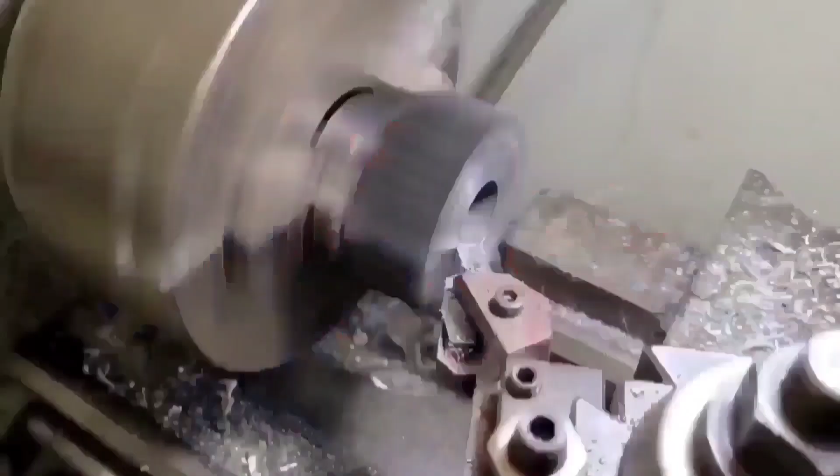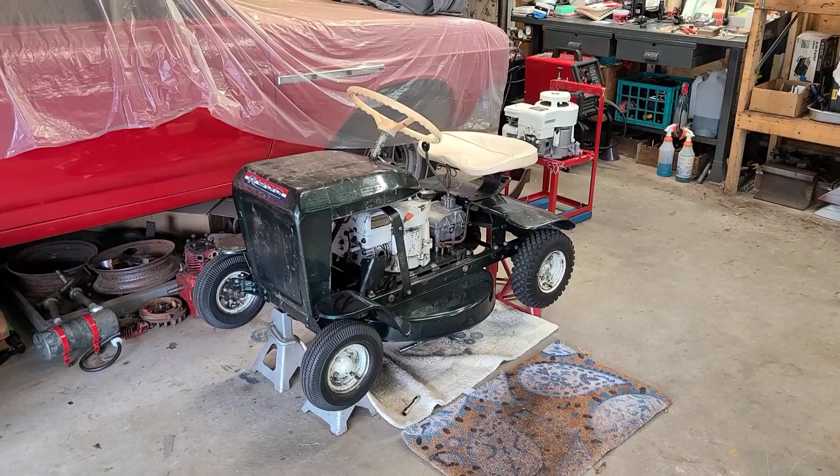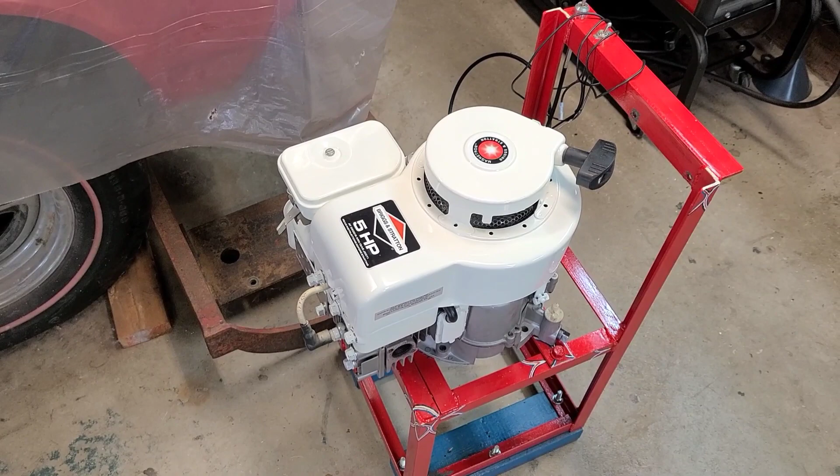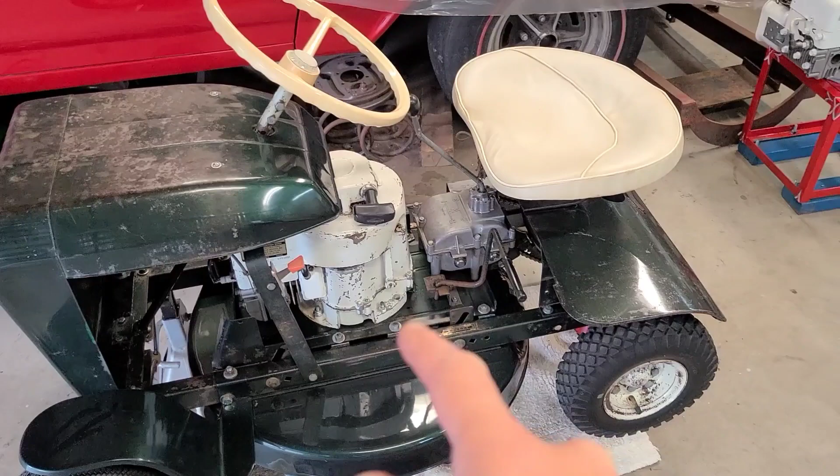How you doing, guys? Today I'm starting the field strip of my Rug Rider in order to get the 5 horsepower electric start engine that I just finished in the last couple videos onto it. You can see I put the decal kit on there, so the engine looks sharp. This isn't going to entail any surgery, nothing needs to be modified, but I do need to take the mower deck off, all the pulleys, the hood, the steering wheel, and the hood stands out of the way in order to get the bolts up and lift that engine up and off of the engine plate. So what I'm going to do is get this thing field stripped, and then we'll start talking about how we're going to reassemble it and get the electric start engine in place. Just when I thought I had everything thought through, curveball.

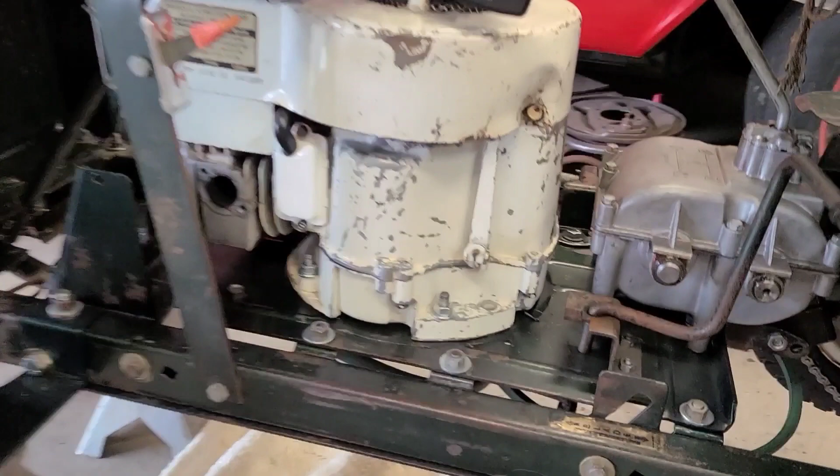Okay, so let's see why. The 4 horsepower engine that's on the tractor, the original style engine, has a 1-inch crankshaft with a 3/16 key slot. The new engine, the 5 horsepower engine, has a 1-inch crankshaft too, but it has a 1/4-inch key slot. So this key slot is too big for the original pulley that goes on the Rug Rider. It's good and it's bad. It's good because there's no point in field stripping this tractor any further - I really need to get the engine pulley to fit and work on this engine. So the bad is we're going to take it off the jack stands and put it back in the corner, and I'm going to have to spend time making a new key insert so I can use that slot with the original pulley.

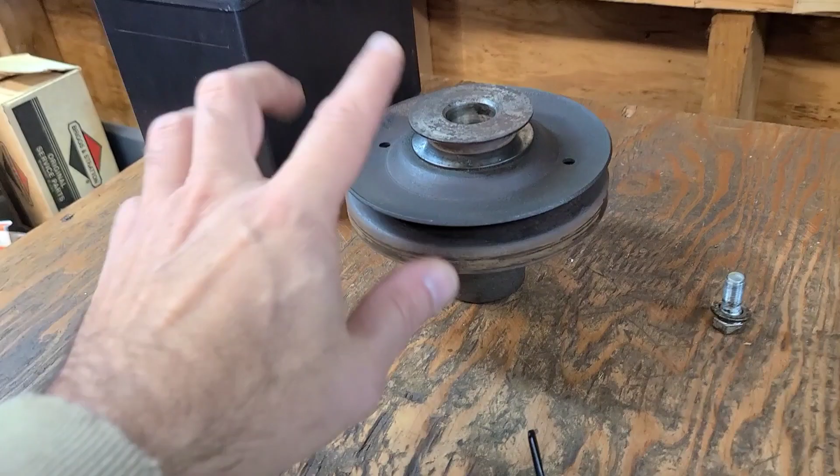So we're going to have a little bit of engineering going on, right? But the good is this - it's smaller on this engine than it is on that engine. Because if this engine was 3/16 and that was 1/4-inch, that would be a real problem, because then I'd have to modify this original pulley if I wanted to put the engine on. And we are not modifying the original pulley. We're not doing that. So basically, where is it? Here we go. Where is that little... yeah, that's it. Yeah, there it is.

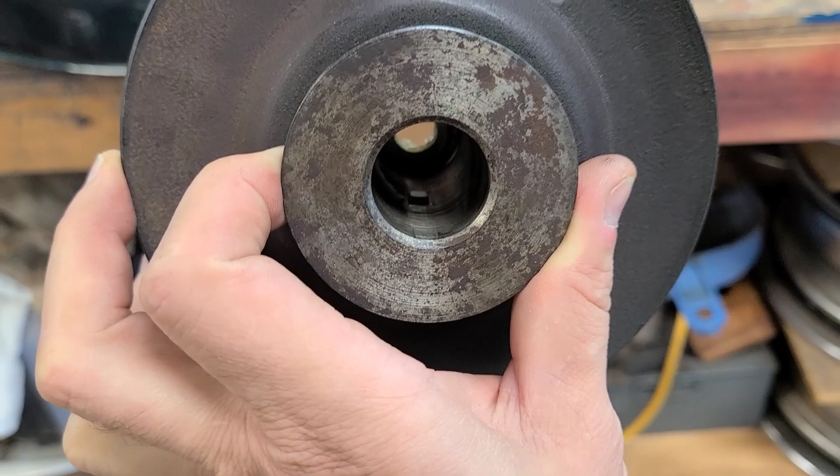If you look right in here, you can see there's a small 3/16 nub inside this pulley. So what I'm going to do is go get a piece of 1/4-inch key stock that fits this slot in the crank, and then I'll get like a small Woodruff key cutter. I'll make a little dimple right in the center where that 3/16 nub or key can go into, and then I'll have the key all the way through, the 1/4-inch key all the way, then I'll make the nub. So I'll put that in place, and then slide the whole assembly up onto the crankshaft, and it should actually be better - where this just had that little tiny nub to keep the engine rolling forward, which drives the transmission, I'll have full engagement all the way through the entire keyway of the crank.

All right, that was a lot, I'm sorry, but there's no point in going any further. So I'm going to take this thing off the jack stands. I am going to probably go to the hardware store and get a key, a 1/4-inch key - key material, I should say, unless I have some. I might have some, but I'll have to check. And then we'll start doing the layout and getting the pulley to fit onto this crankshaft perfectly before we go any further with this.

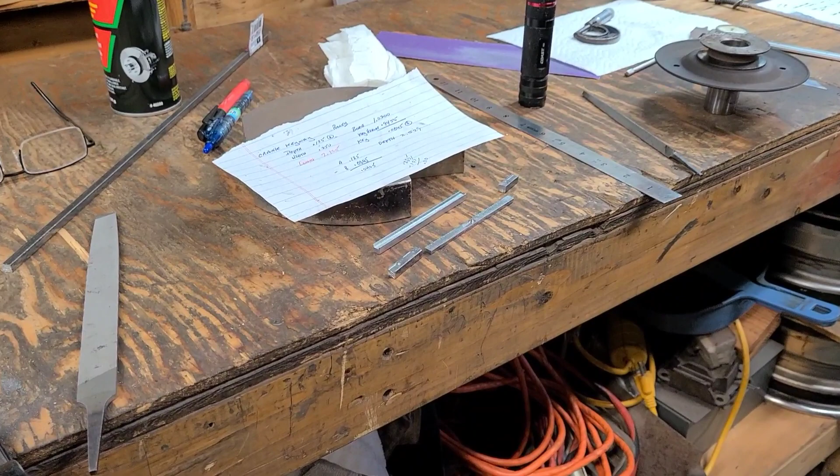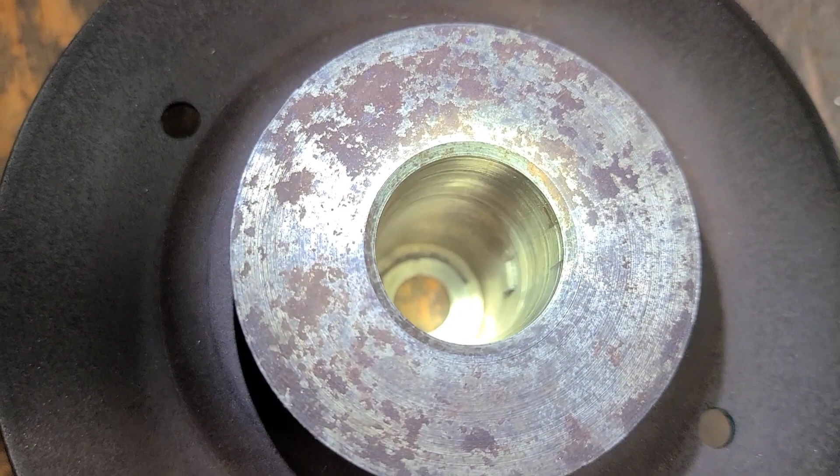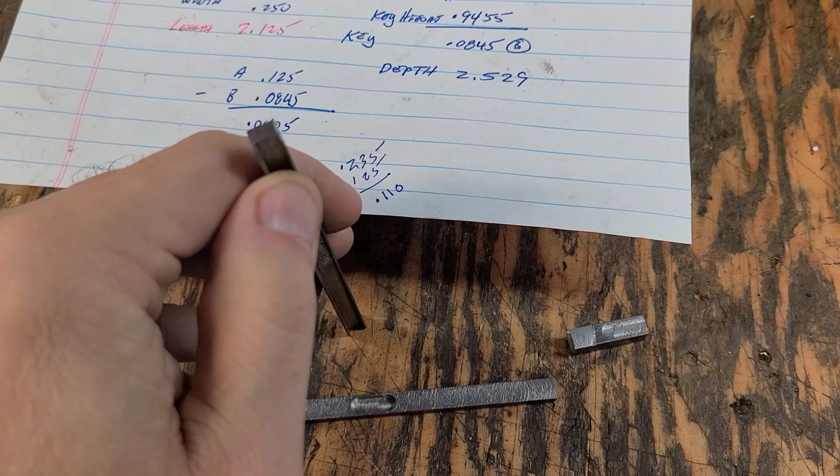So after some rough math and a little bit of machining, I came up with what I think is going to work. My original thought or design was to basically make a little trough that the little nub inside the pulley here - you can see it right there at about the 3 o'clock position - that little nub engages the key of the crankshaft of the motor. I thought I would start off and just make a big trough slot that little nub could go in, and then this would fit into the keyway into the crankshaft. But after looking at it, I was like, you know what, this is just not what I want.

So I went to design number 2, which is to actually make an insert for the crankshaft. I'll plow out a little section, a little cove if you want to call it, that the nub in the pulley will interface with. So I'll drop this down into the pulley, put the nub in there, and then slide the pulley and this insert all the way up the key slot of the crankshaft.

Now, I cut these ends off it, and I do need to trim the ends down to get this slot centered up so the little key nub will drop into it easily. But in general, the mathematics here is pretty simple.

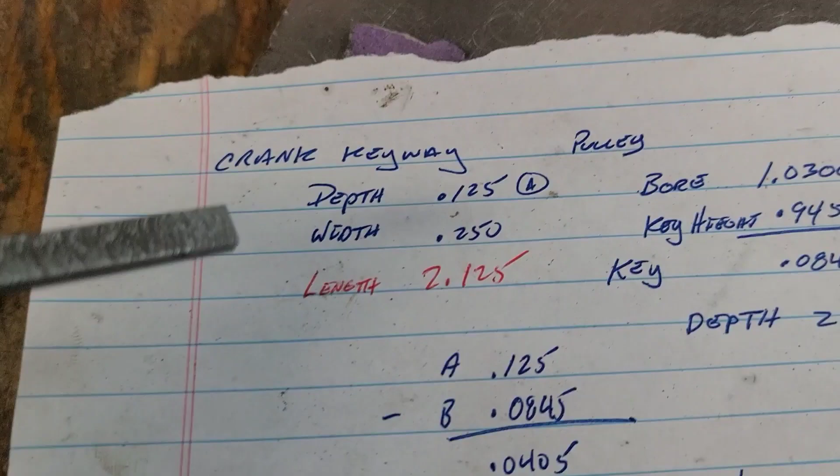The depth of the keyway in the crank is 1/8 of an inch. That's that thickness right there. The width is 1/4 inch. That's the width right there.

And the length is 2.125, 2 1/8 inches. But I'll make that in a few minutes.

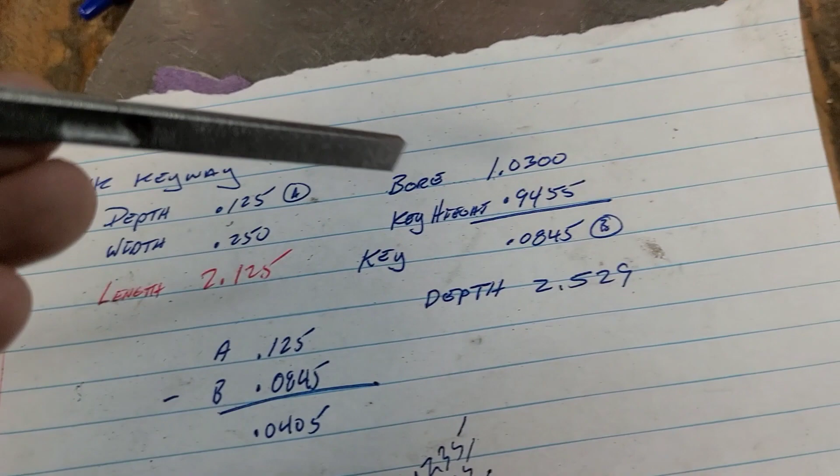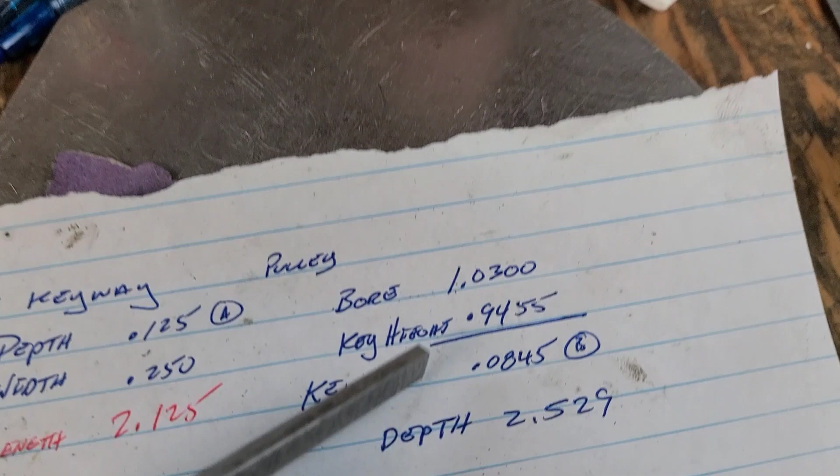Now, to come up with how deep this slot needed to be, I took my little bore gauge and I measured the bore of the pulley, which was exactly or pretty close to 1.0300. And then I took another measurement with the bore gauge from the top of the nub to the opposing side of the bore.

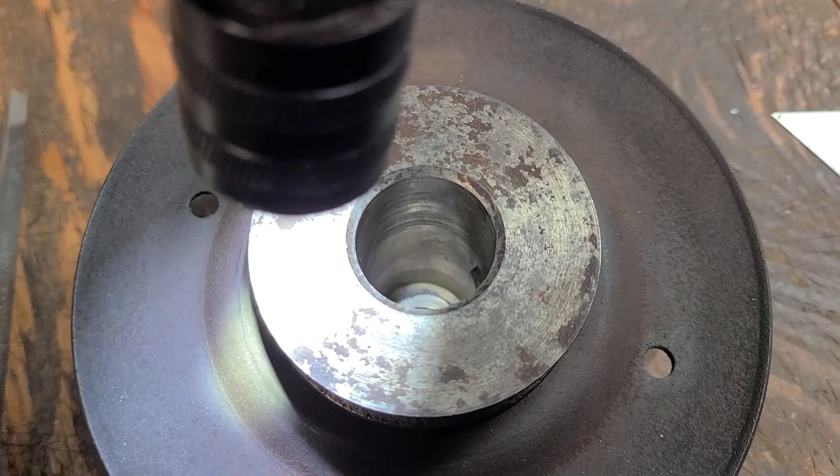Okay, so that way I knew how thick the nub was, so to speak. And that measured out to be 0.9455.

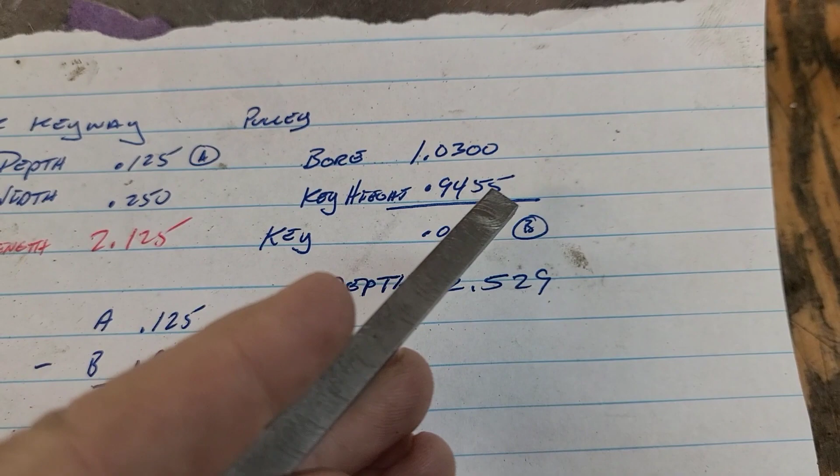So the nub itself is 0.0845 in height. So what I did was I bored down into this 0.0845, and that's the depth of the slot.

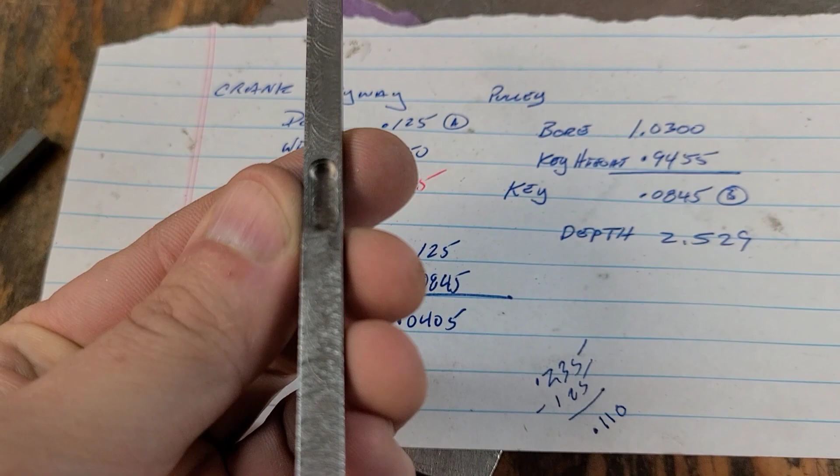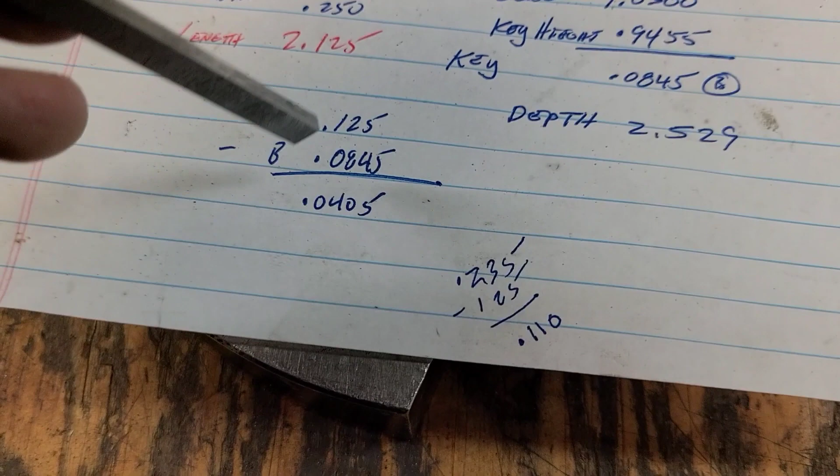And the slot obviously is centered as close as I could get it into the 1/4 inch piece of steel. Now, the thickness of the base, so the thickness of the base of the slot to the back is actually 0.0405. And that's taking 1/8 inch, minusing this, and that's what's left over.

So that's how thick the back of it is. And what was this here? And then because I had machined the piece of steel down a couple times, it was 0.235 thick.

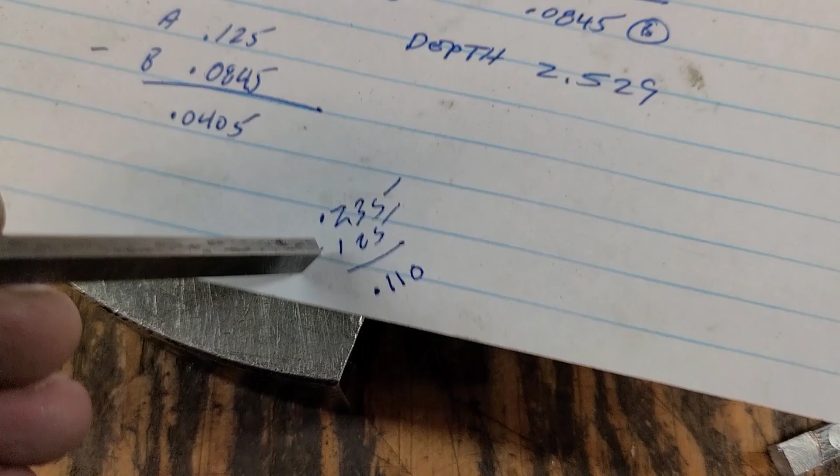I need 1/8. So then on the back side, the last machine, to get it to the appropriate thickness of 1/8 inch, I had to take 0.110 off. So that's essentially where this is.

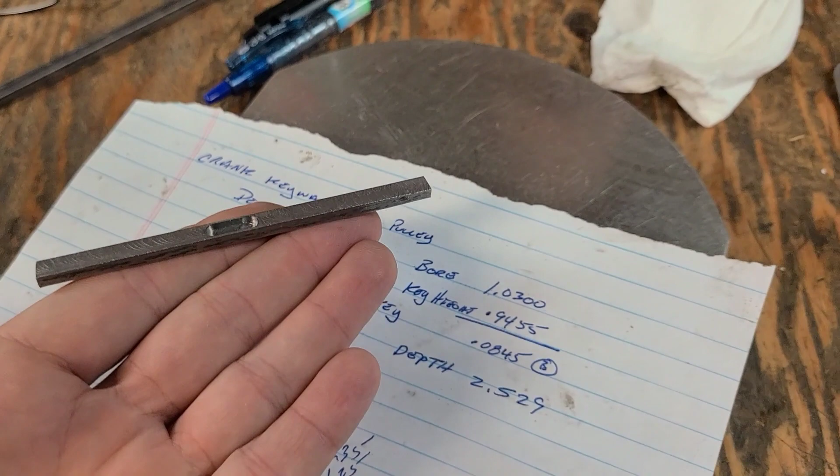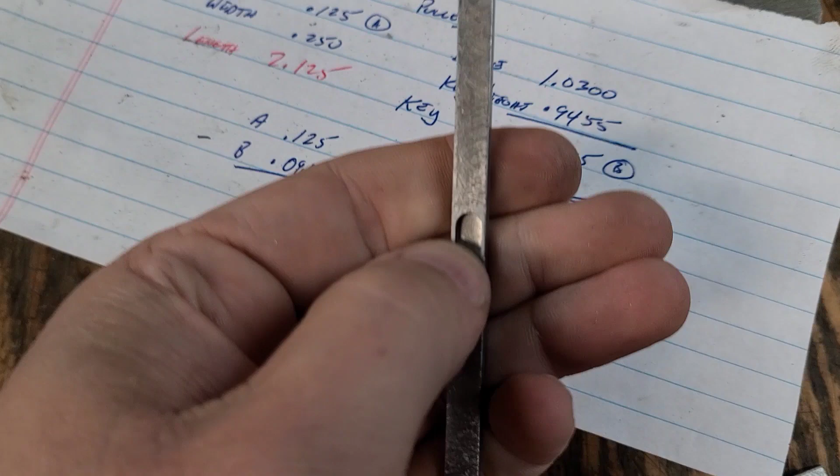So right now what I'm going to do is I'm going to go ahead and make a measurement from the base of the pulley, the very bottom of the pulley, to probably the top of the nub, the very top, not the thickness top, but the part of the nub that's closest to us, so I can get the measurement basically from where the arc starts to where I need to cut it off.

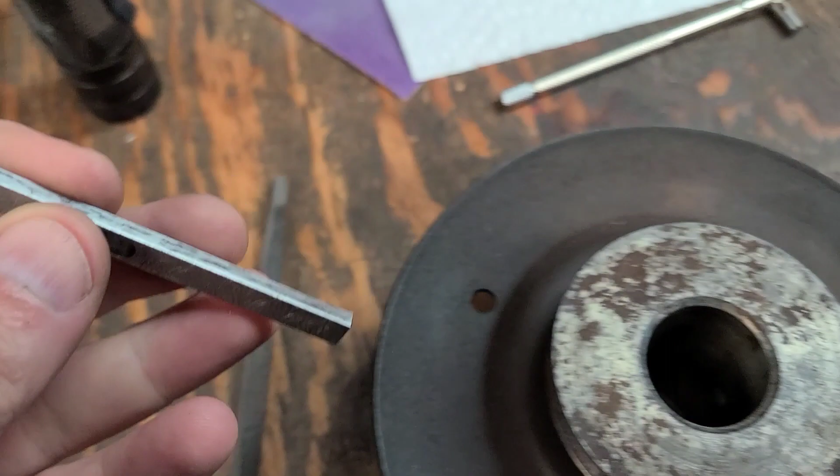And I should be able to drop this down, and that should interface with the nub. Then from there, I will go to the crankshaft and see how much I need to take off the opposing side, so that way this will fit in and everything will slide together real nice.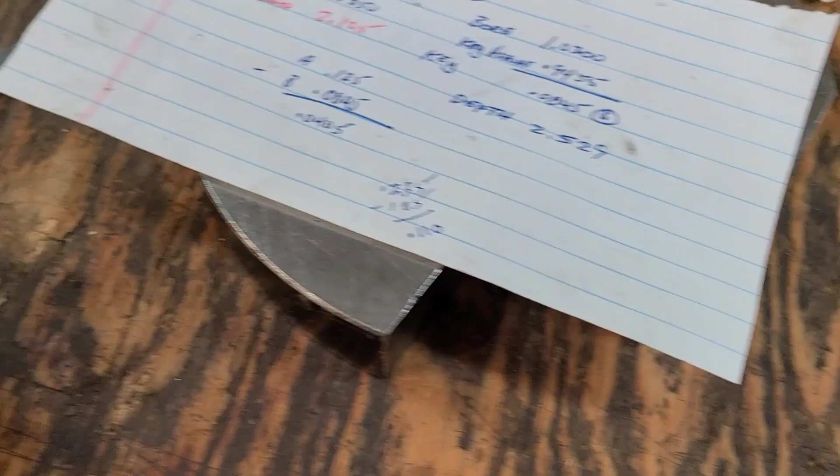If I had used this piece and thinned it down, it was my belief that it would have wiggled around because there's really a lack of material to hold this steady. So with this, I'm using the entire key way of the crankshaft.

All right, I know that was a lot, so let's go ahead and do some trimming and get this thing fitted in.

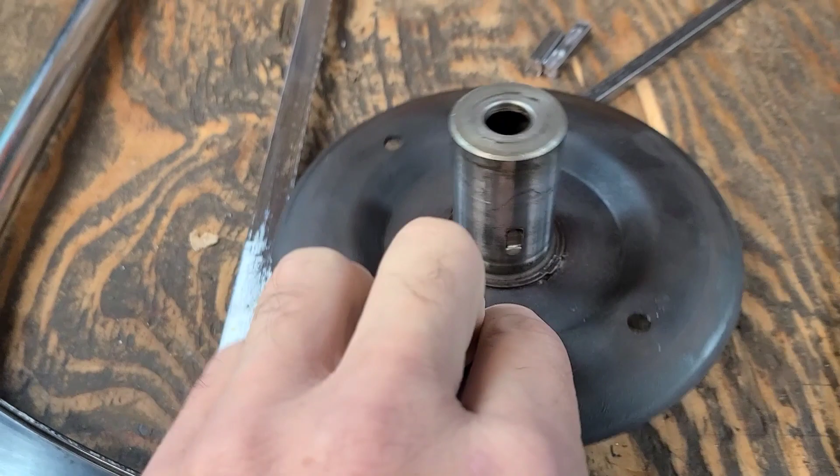I went ahead and measured from the top side, because this is how the pulley goes on the engine. So essentially from the top side of the nub to the base of the pulley itself, which is, well, I'd say it's a good 1/8 of an inch, maybe 3/16 of an inch thick.

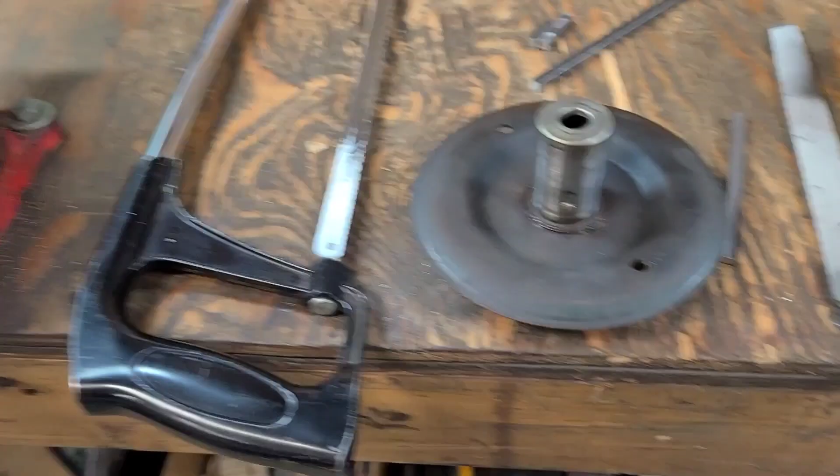So from the inside base, not the outside, the inside base to this, I took a measurement. I used my dial calipers right there to make that measurement. So I'm going to go ahead and nip this portion of the key off. I'm hoping that it'll just drop in, but I might have to file fit it.

I have the key in the bore of the pulley. If you take a look, that edge is flat all the way against the pulley on both sides. The little nub is in my key slot that I made, and the key itself appears to sit nice and flush all the way along the pulley bore.

So what I need to do now is measure the crank, because the crank has a little bevel right here, you can see it. I'm going to measure down just a hair from the start of the bevel to the base, and that should give me the length of the key I need, because the inside of this bore sits against the bottom of the crank.

So let me get that measurement, a good measurement. Then I'll cut the overall length and we'll go ahead and test fit it.

Okay, this is like the 30th time I've tried to shoot this, but it just won't go. There we go. All right, so preliminary test fit, I couldn't have asked for that to go better.

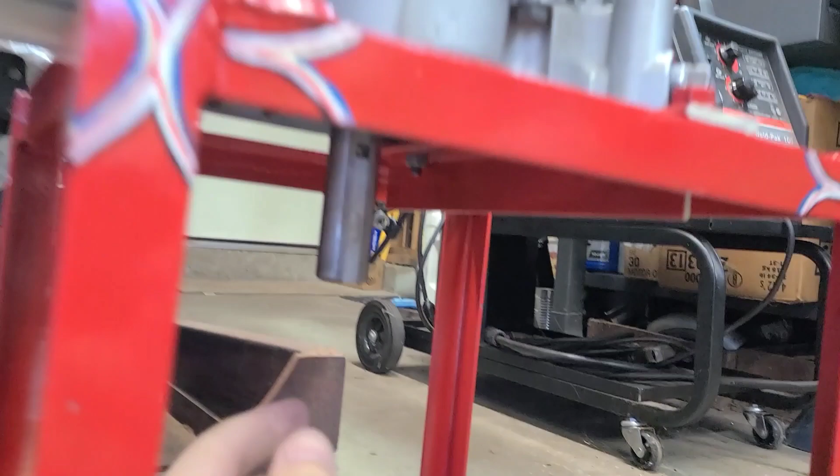I did go ahead and sand the edges. The only issue I have is right here at the very bottom, there's a little edge where the key sticks out of the crankshaft just a hair proud. Sorry about the blurriness, this camera won't focus. Let me pull back so you don't go blind. Right here, the key sticks out of the crank by just a couple thousandths.

That's going to be an issue. The top fits absolutely flush, perfect. It slides in and out. The key itself fits beautiful in the slot, no play at all. So what I'm going to do is thin this section of the key down a little bit, and we'll go for an official test fit.

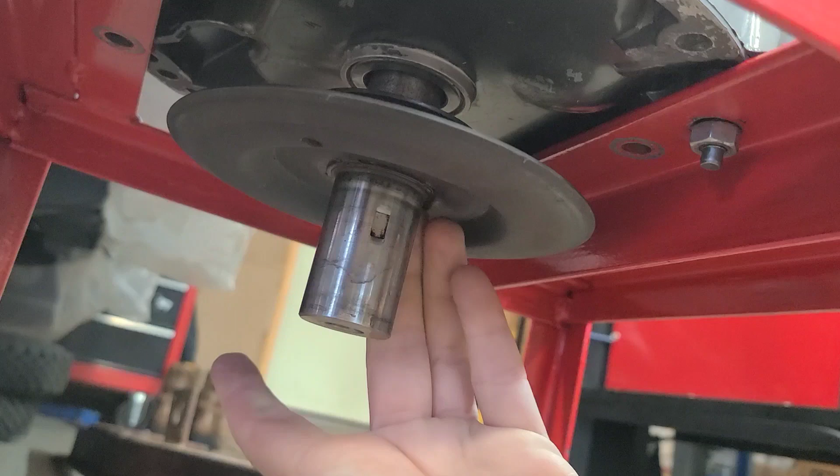Holy cow, it works. I can't believe it. It fits. I mean, there's maybe just a couple thousandths in there, if that. So that thing is perfect, and it slides on and off mint.

I'm just holding it up because if I let go, everything's going to kind of fall apart. That key I made, I just took a little bit of grease on the top and a little bit on the bottom of it just to hold it in place. And my God, it's there.

Dude, look at this. Look how nice it slides on and off the shaft. I'm just going to let it come off. Oh my God, I can't believe how good that came out. And look how perfect it is in there.

Oh my, I'm sorry guys, I'm a little bit proud of myself right here. I was a little nervous. I said I rebuilt this engine and I don't even know how I'm going to be able to use it.

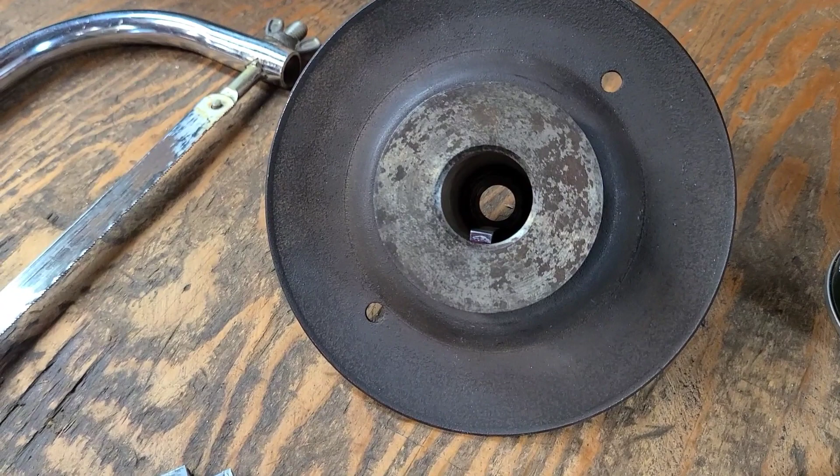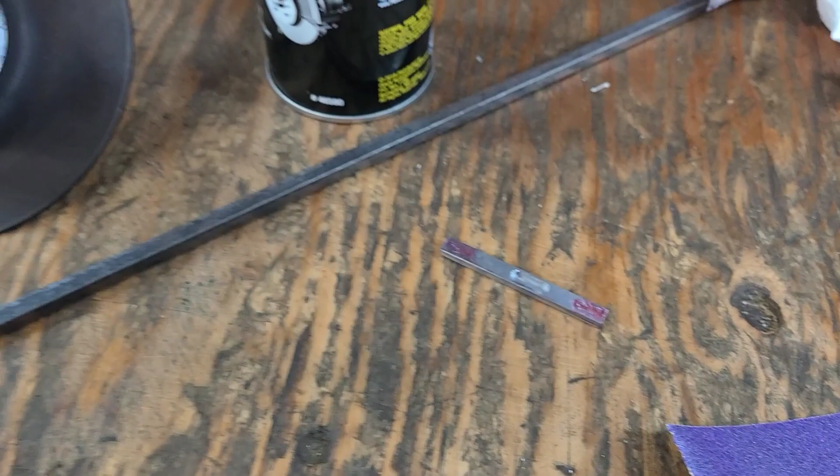Like I said, I just held it in place with a little bit of grease. Just a couple little bits of grease to hold it in place, and it held it all in place, and I was able to just slide it right on. So, yeah, that is pretty darn cool.

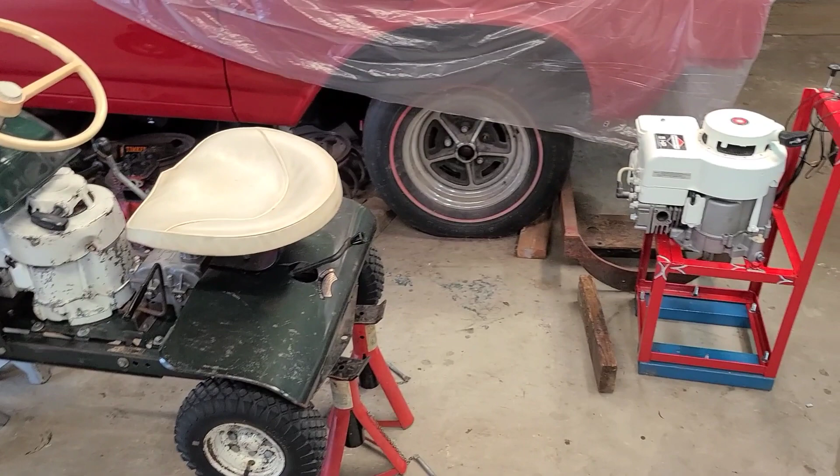All right, guys, not quite the ending result that I wanted, but I think it's pretty positive. You can always just kind of come up with options, right? And I came up with an option. It appears to have worked. So I'm super stoked, you can probably tell because I'm talking in circles here.